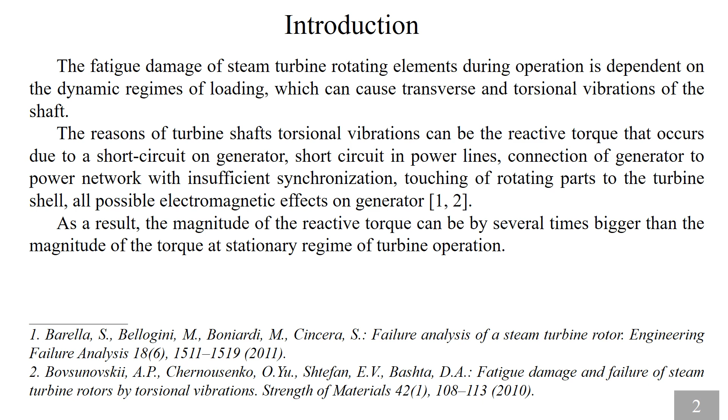The number of cycles of vibrations with maximal stress amplitude exceeding the fatigue limit of rotor steel at each startup of turbine can be in the range from tens to thousands. As a consequence, during the lifetime of turbine operation, fatigue damage gradually accumulates. The object under investigation was steam turbine K200. Turbine of this type consists of three rotors: high pressure, middle pressure, low pressure, and generator.

The geometric model of the shaft is developed in accordance with the drawings of the manufacturer and takes into account the main structural rotating elements of the turbine. At the same time, the geometric design of the blades and bandage connections was replaced by toroidal discs to reduce the time of numerical calculation. The sizes of these discs are specially selected in such a way that their mass is equal to the mass of all blades and their mountings of this stage.

Also, the outer diameter of the torus corresponds to the similar diameter of the blades. The studies conducted by the authors showed that such replacement is justified, since the error is about 5%, but the calculation term is reduced significantly. The model consisted of 200,000 finite elements. The shaft is loaded by three static torques, caused by the pressure of steam.

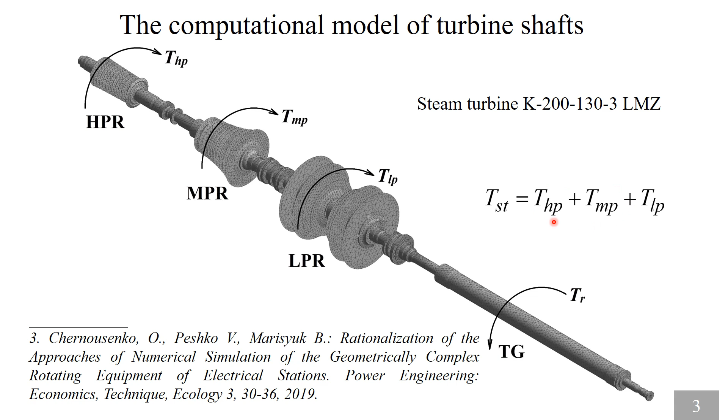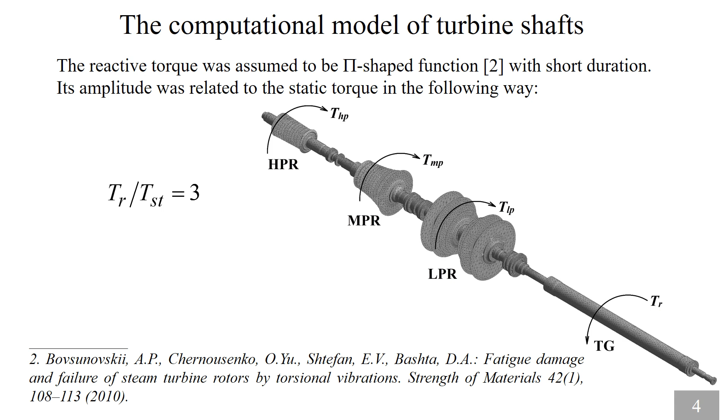Torsional vibrations are excited by the reactive torque, which can be of electromagnetic or mechanical nature. Total static torque is the sum of static torques acting on rotors. The reactive torque was assumed to be a P-shaped function with short duration, which can simulate unsuccessful connection of generator to power network or mechanical interaction of turbine structural elements with the turbine shell. Its amplitude was related to the static torque in the following way.

So, on this slide we can see generator power dependence of damping characteristic of four modes of turbine shaft torsional vibration. Damping characteristics of the shaft were experimentally determined for different mode shapes in this work. In calculations, damping in terms of logarithmic decrement was accepted in this way.

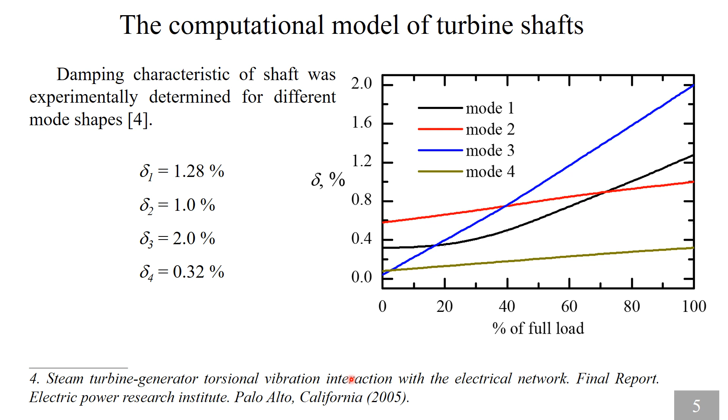The first phase of this research is calculation of shaft stress-strain state during turbine operation at rated load of 200 MW. The values of torque on rotors were assumed to be 200 kN·m for high pressure rotor, 290 kN·m for middle pressure rotor, and 160 kN·m for low pressure. The sum of these moments is a nominal static torque, acting in the area of coupling between the shaft of steam turbine and the generator.

This figure demonstrates equivalent stresses by Mises in the stationary mode of operation of K200 steam turbine. As can be seen, the highest stresses are observed between the low pressure rotor and turbine generator. They are in the range of 150-180 megapascals. The stresses that occur in the area of semi-rigid coupling between the middle and low pressure rotors are nearly 70 megapascals, and in the area between the high and middle pressure rotors are nearly 50 megapascals. The obtained stresses do not exceed the strength limit for 25 chromium steel, so the stationary operation does not lead to the significant accumulation of damage in the turbine shaft.

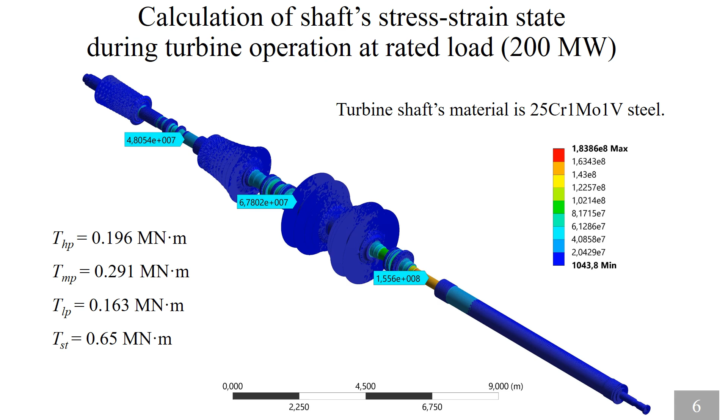On the next phase, the stress-strain states of the shaft were calculated for the forced vibrations caused by the short-term reactive torque, and then for the free vibrations when the reactive torque disappears. As it was mentioned above, the reactive torque was accepted to be 3 times bigger than the static torque. The duration of reactive torque was chosen so that the intensity of torsional vibrations was the highest, namely 20 milliseconds.

The most dangerous areas of the turbine shaft are coupling between high pressure and middle pressure rotors, as well as the sections between middle and low pressure rotors and between low pressure rotor and turbine generator. These figures demonstrate the time dependence of equivalent stresses amplitudes for these areas as a result of the action of the reactive torque. The maximal amplitude of equivalent stresses between high and middle pressure rotors is observed after 71 milliseconds from the beginning of the reactive torque and reaches 550 megapascals.

The maximal stress amplitude between middle and low pressure rotors is observed in the fourth cycle of vibration at about the same time and reaches 495 megapascals. Equivalent stress amplitude between low pressure rotor and turbine generator reaches its maximal value 16 milliseconds after the arising of torque and reaches 800 megapascals. This value somewhat exceeds the strength limit of rotor steel. Approximately 4 seconds after cessation of the reactive torque, the vibrations completely damp.

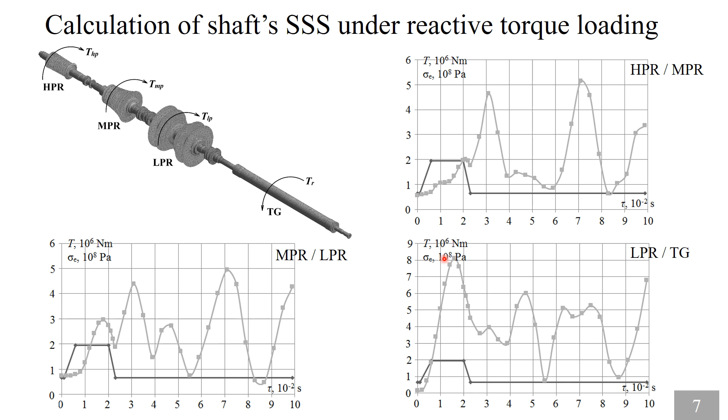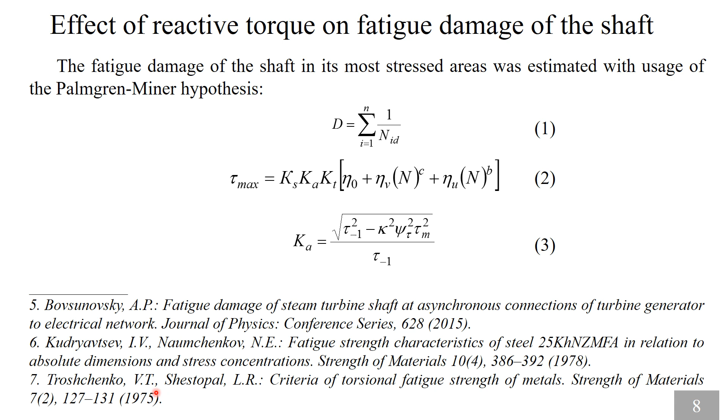The turbine shaft fatigue damage, which is accumulated during operating time, was calculated as a result of 2000 actions of the reactive torque. It is necessary to note that the failure takes place in the case of damage equal to 1. The estimation of fatigue damage was based on the supposition that the reactive torque duration is distributed uniformly in this range of time. The averaged over this range fatigue damage was calculated according to the following equation.

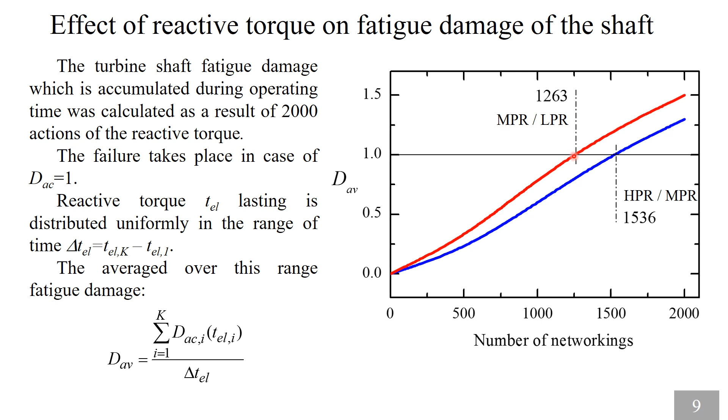Also, it should be noted that the estimation of fatigue damage is somewhat simplified, since it suggests that all 2000 actions of the reactive torque have the same parameters. Of course, real scenarios of loading are much more complex. The developed procedure can be applied for the evaluation of turbine shaft fatigue damage if the parameters of the reactive torque are measured in operation of turbine units.

And finally, let's highlight some conclusions of this research. Long-term exploitation of turbine equipment of thermal power stations, which undergo frequent startups and shutdowns, gradually accumulates fatigue damage in the most stressed areas of the turbine shaft. The reason for fatigue damage is the intensive transverse or torsional vibrations of the turbine rotating elements of different nature. The experimental-analytical procedure to estimate the fatigue damage of turbine rotors because of torsional vibration was developed. To apply this procedure in practice, it is needed to know the intensity of turbine shaft torsional vibration in operation

of turbine unit. For the reactive moment with the parameters which were assigned as an example to show the idea of the procedure, the most stressed area of the turbine shaft is the area between low pressure rotor and turbine generator. The least stressed area is the area between high and middle pressure rotors. In any case, under the action of the reactive moment with the chosen parameters, the resource of turbine unit substantially drops. In general case, the intensity of turbine shaft torsional vibrations is dependent on the magnitude, duration, and the shape of the reactive moment time function.